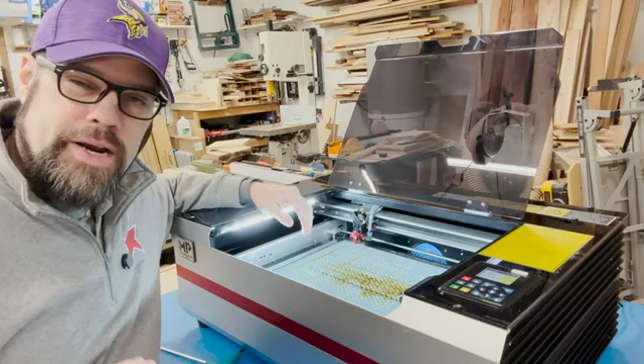All right, so I've brought you in a bit closer to take a look at it. We've powered up the machine. And so this is what I'm talking about. This honeycomb just kind of sets in here and it can slide around.

Now, if I want to have a repeatable cut, I need something that's fixed, that's going to hold its position relative to the machine's home point that I can then repeat. I can drop the material in and know that it's going to be going to the same position every time. So as we move this around, the working area of the laser is about the honeycomb actual area.

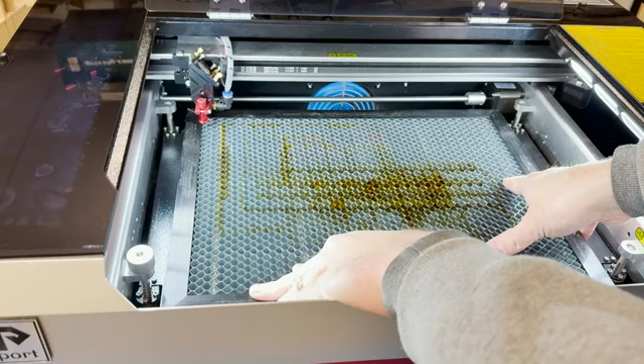There's maybe about a 1/4 inch extra in both directions, so not a lot of extra area to work with. So what I'm going to do is kind of take a look at where this needs to sit and see what our options are. So if we move this up into the corner, and I'm just kind of basing it off the red dot light in the corner of the honeycomb there, we bring this down, we got it a little bit crooked.

We've got a little wiggle room. We could slide this back just a touch maybe. And I think to get this really dialed in, I'm going to want to get maybe get some white paper on here so we can really see that red dot. But we're going to kind of make sure that it's going to be within the bounds. And that's pretty close. Now let's take a closer look at the sides.

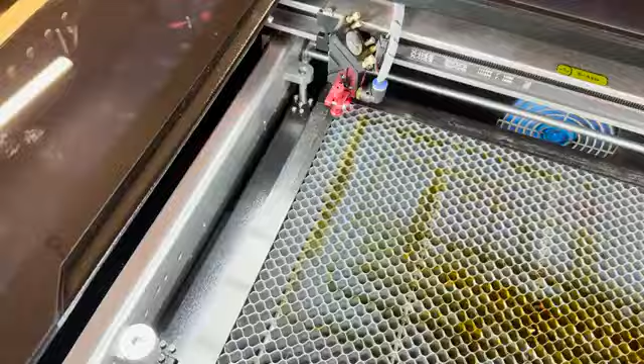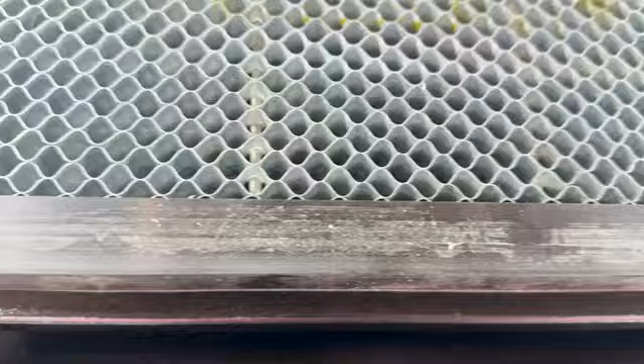So my thought process here is we have kind of this section, this side rail here, where we could put kind of a bracket. Same thing over here. Now up front, it's a little bit closer to that, but we could make a little bit of a corner bracket here that would maybe wrap around. It would catch the front and it would catch the side, kind of locking that in place.

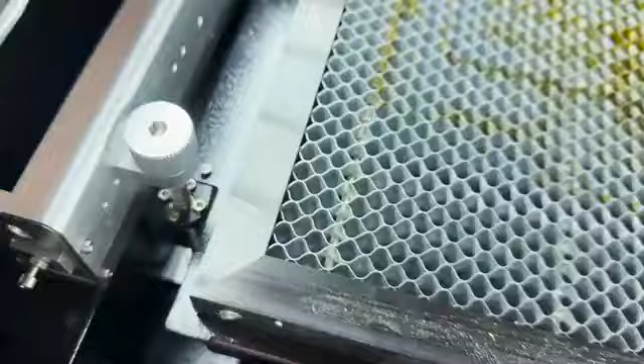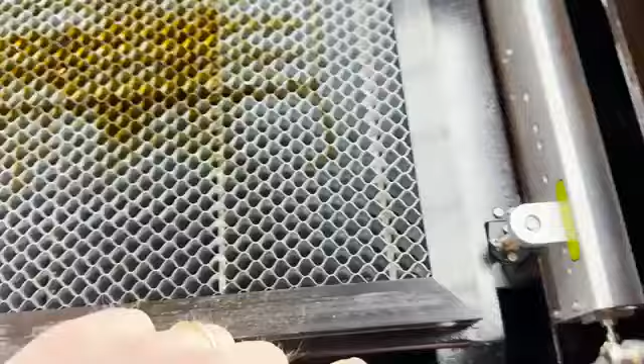Unfortunately, it actually at this point is overhanging the back, and so it's going to be hard to get anything on this side holding in. So I'm going to be mostly relying on maybe some side points and then this corner point, and then we just need to make sure it's slid all the way back this way.

So let's jump into the computer, see what we can design and 3D print out, and then we'll come back out here when we got the parts.

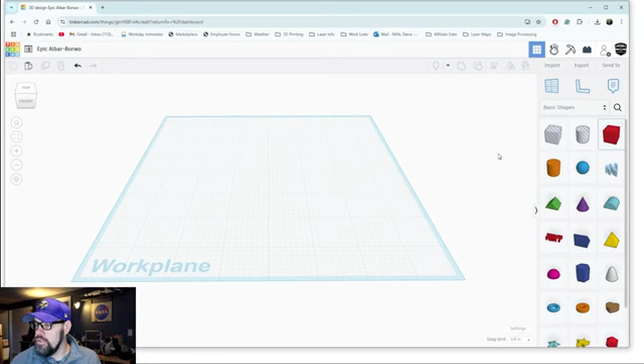All right, we're loading up Tinkercad here, and so this should be fairly simple to make. We're going to be mostly just using some blocks here. So I'm just going to drop in a block and I'm going to create the base first. So we really just need this to be about an 1/8 inch thick, and we probably don't need it to be quite this wide. We're going to go 5/8.

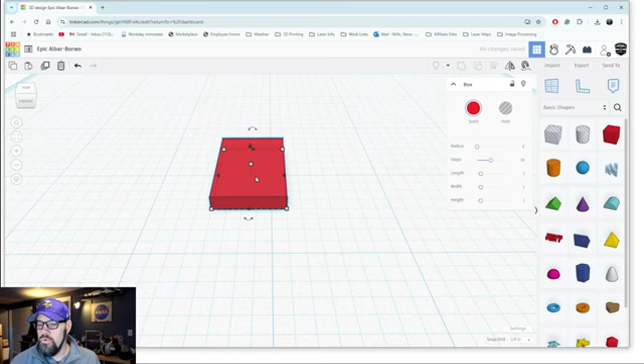And what was the other dimension? The other dimension was an inch. Yeah, an inch long should be good. So I'm going to go ahead and Control C and V. We're going to copy that.

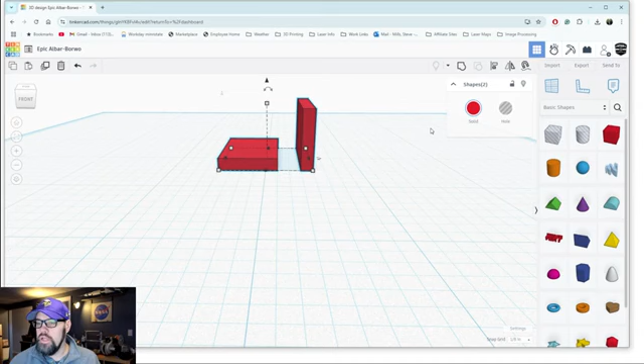And then I'm going to take this one. I'm going to rotate it up on end. There we go. And we can bring that up to the surface. And now I'm going to just simply align these two. We're going to come over to our alignment tab, and we want to go here.

And that looks good. So that'd be a decent bracket, although 5/8. Yeah, let's bring this one down to 1/2 inch.

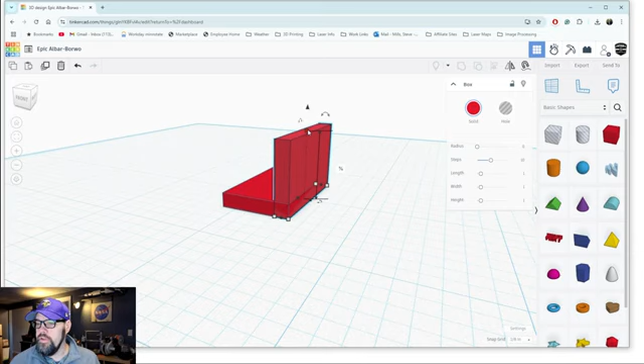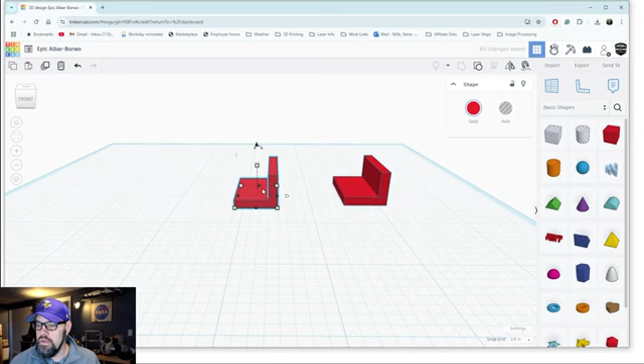There we go, I don't want it sticking above the honeycomb. So that should be great for the side rails where we don't need any capture point. I'm going to go ahead and copy that, bring this one over, but then we're going to turn this one into a solid and move that to the side for now.

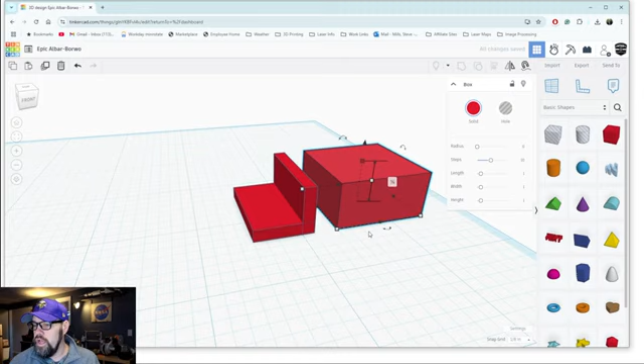For this one, we want to add - we're going to be capturing on the side, so we need something to stick out this way as well. So we're just going to drop in another box, and this one we can bring down at 1/2 inch. And we definitely don't need this as thick as that, we're going to go 1/8 inch.

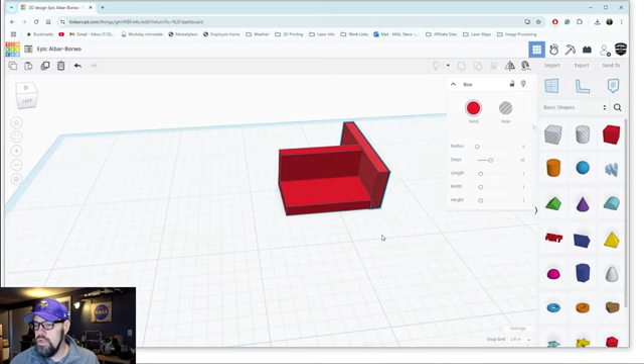And we actually want it - I think we're going to anchor it over this way, give it this nice little T shape off the side. And yeah, actually, I think that will probably work out okay. So I'm going to go ahead and combine all of these three.

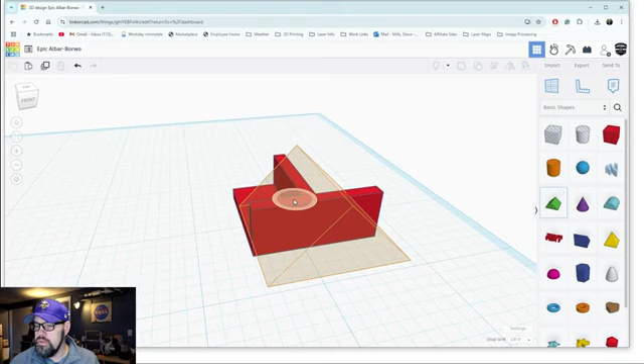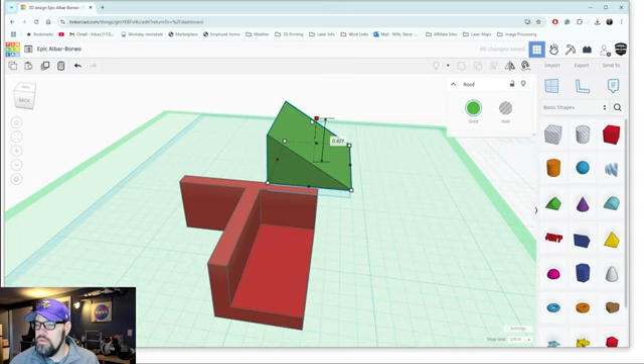About the only other thing we can maybe do is take this triangle piece and I'm going to rotate this that way. And I can bring this down, this in.

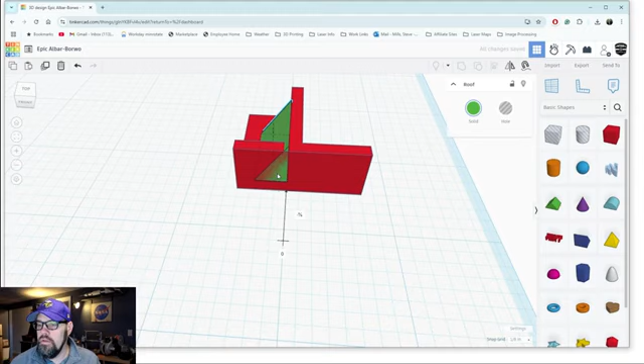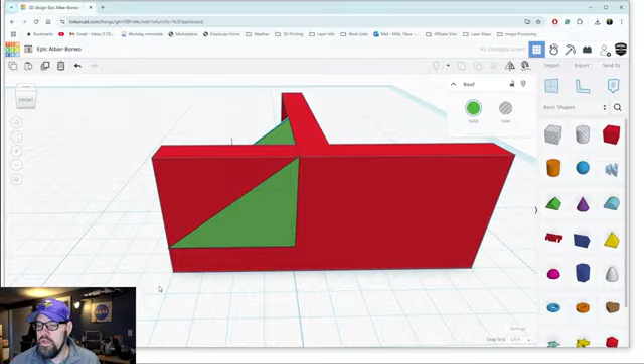Where are we at here? All right, that's in alignment. Now I just need to bring this down to there, and I need to bring this out to there. Then we're going to bring this to there. All right, that should be good.

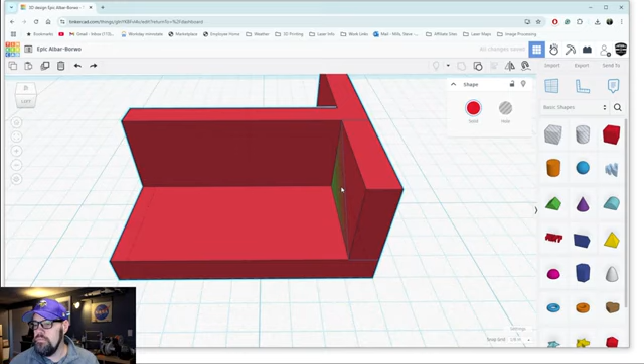Now I want to do - oops, undo that. I want to grab that and I'm going to rotate it 180 degrees. Negative 180. I'm going to turn it into a hole.

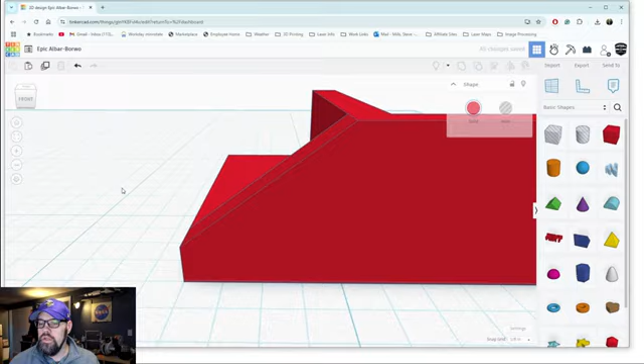And then we're going to take these and combine them. There, it just gives it a little less of a sharp edge that's going to be hanging out there. Also a little less filament for us to use. Makes it a little more interesting anyway.

So the idea is this is going to be sitting on the rail. This will capture - the honeycomb is going to sit inside of this corner. And we'll actually need to make a mirror copy of this.

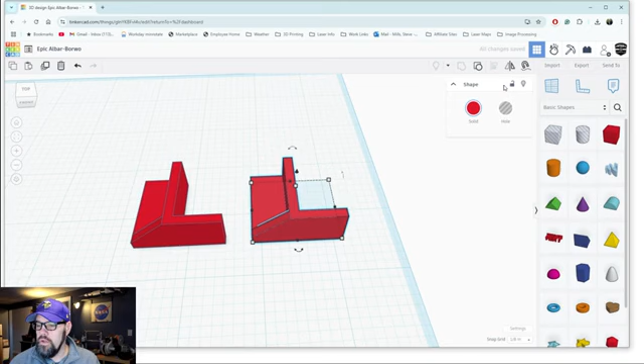First we're going to copy it. Now we will take a mirror copy this way. And now we have those two parts. I'll print out a bundle of these so we can have them to play with as well.

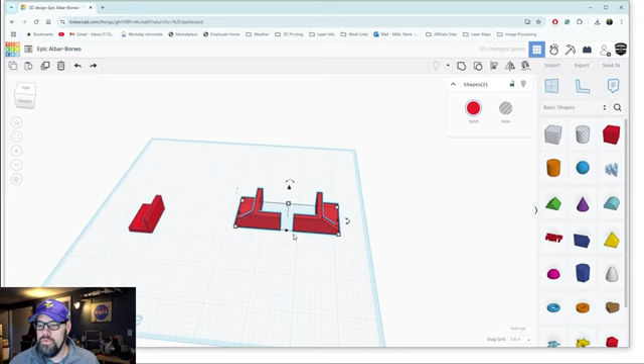And I'm going to send this off to the slicer, so I need to export this. Oop, it's meaning to slide this over here. All right, I'm going to go ahead and export this as - well first off, I'm going to change the name. So we're going to go Reno Honeycomb blocks. Now we'll export it.

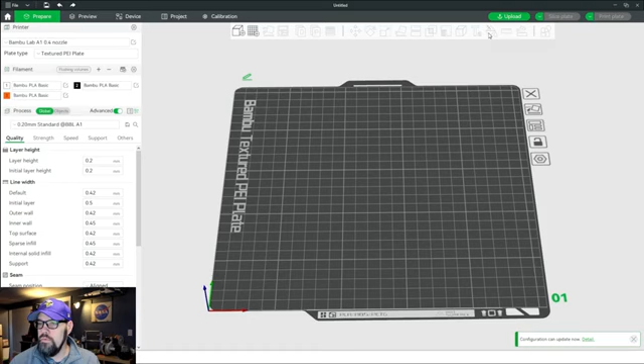STL, go to my downloads folder, we'll open up Bambu Slicer, and we're going to go ahead and import. So I got to drag that file over to my downloads folder. There we go. We are going to change filament to the orange that we've got loaded into the AMS. We're going to clone that. Now we probably will need 4 total.

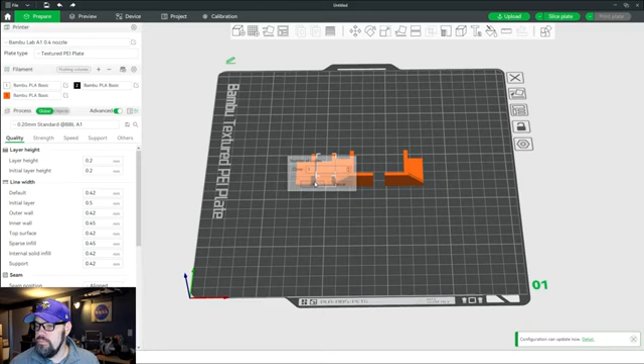Just that, let's just bring this one down over here. All right, we're going to slice this. Looks like it's going to take about half an hour to get those done. So I'll send those off to the Bambu, we'll get them printed out, and then we'll head back out to the shop.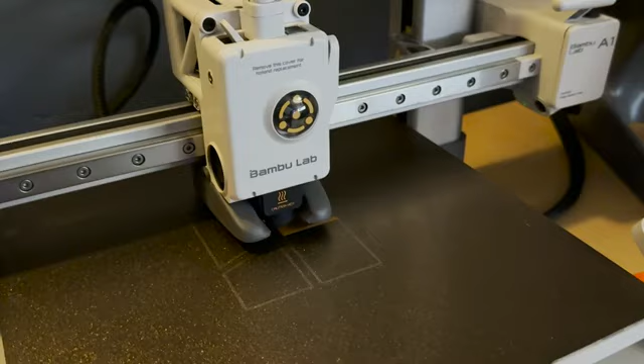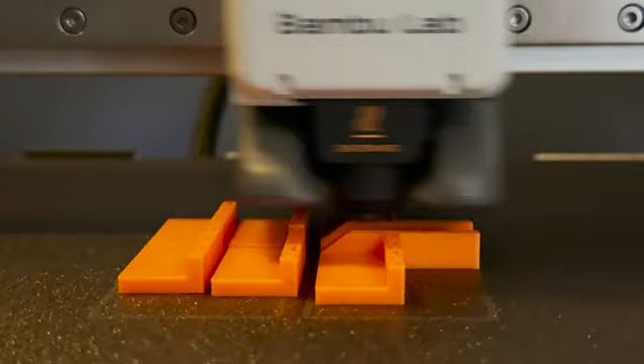Now, I've had a lot of people comment on, are 3D printers really worth it in a shop? It seems like you just print out silly things you could buy at Walmart or other stores. And this is a kind of classic example of where it is really handy to have the 3D printer. I identified something I wanted to improve in my shop, was able to design the parts, and we'll be able to drop them into the laser and make this work. So hopefully you can see this as an opportunity of why one might be useful.

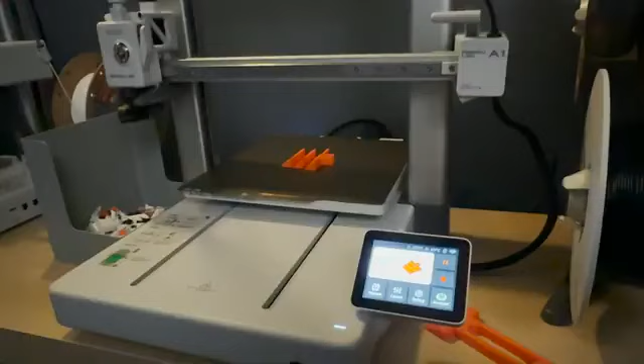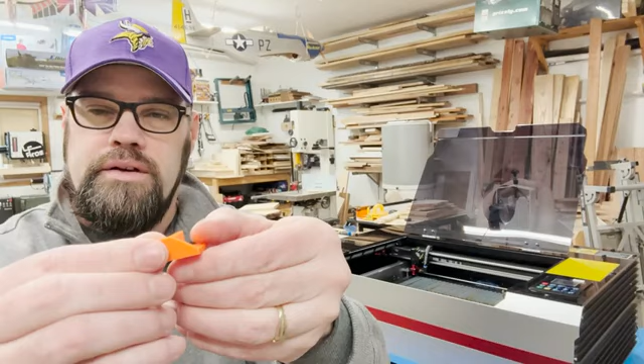All right, so got these printed out. We have the side pieces here that are just the L shape, and then the kind of corner one that we're going to put up front. 1/8 inch material, it seems pretty strong at this point. This is just PLA, just doing it as a test, and I think it should be fine as long as you're not really pressing it hard.

You just want it snug, you know, it doesn't need to be like holding it tight. So let's zoom in on here, let's see if we can get this aligned. And I think what I'm going to use to put these down is just some double-sided tape. It should hold fairly well, but if I need to pop them off, they will be.

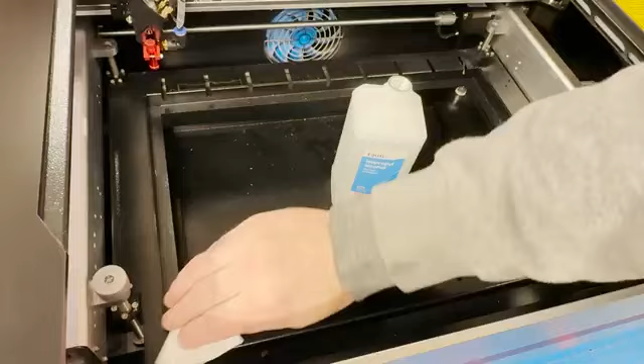So I'll probably clean the frame first with a little bit of alcohol, make sure there's no dust on there. And then we'll get this positioned to start putting them in place. So I start by just wiping down with some alcohol. We want to make sure that these are clean, otherwise that double-sided tape might not stick.

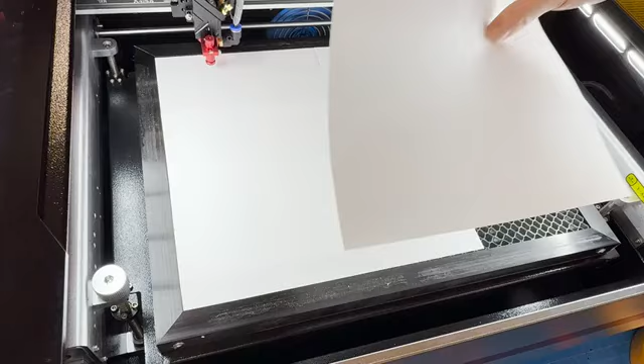So I'm going to place the honeycomb back in, and then I'm going to drop some white paper on here. It's just going to help me make sure that the red dot is showing up in the corners. I want to get this as centered as I can because this laser does use almost the entire honeycomb bed area. So a little bit of adjustment to make sure it's in place, and then we can start placing our blocks.

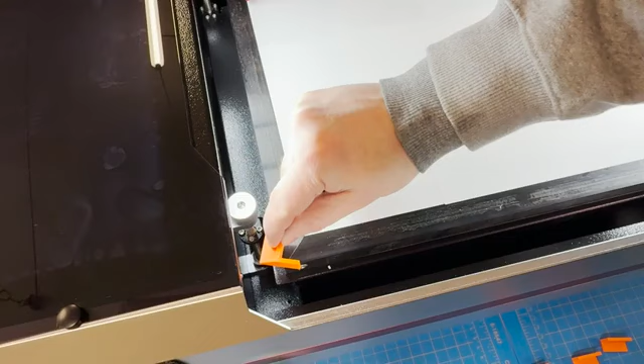Okay, so what I'm finding here is these little rivets on both sides are actually keeping this from grabbing the corner. So I think I may take some measurements here. I'm going to redesign it. It's also hanging over further than it needs to be, so I can probably shrink it up just a little bit. So iterations are part of this process.

I'm going to go ahead and redesign those, and then we'll print them out and check it again. All right, we're back at the computer, and I think it's a fairly easy fix.

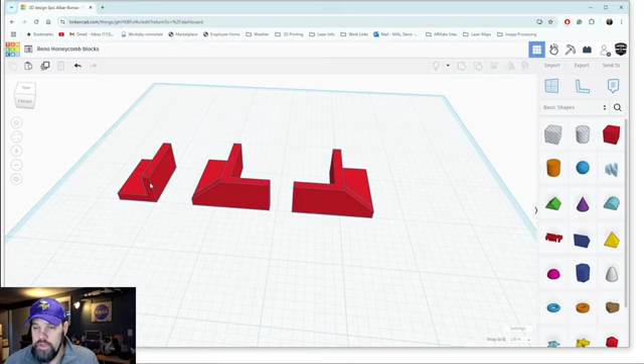I'm going to really just squish this down. This doesn't need to be any higher than 1/4 inch, and then it'll capture that. And that should still grab the honeycomb, and then we can bring this side in. So hopefully here, if we just bring this down to 1/4 inch like that, we're going to need to chop off 1/4 inch off this one.

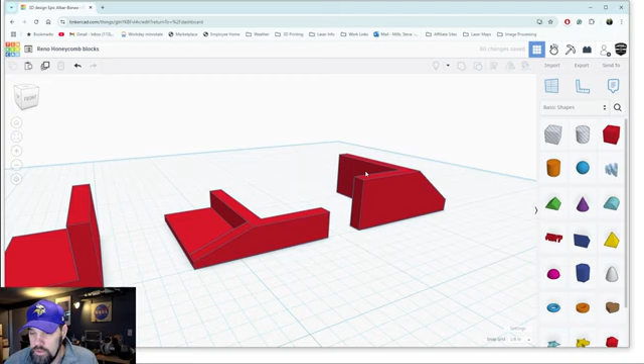So an easy way to do that is just grab our little block. We are going to make this—doesn't matter really how tall that is. You just need this to be 1/4 inch. And now we can move this to there.

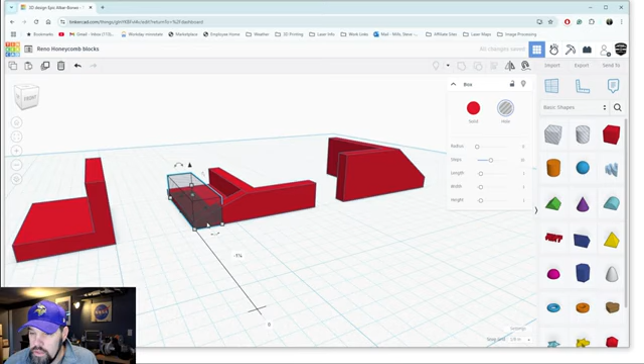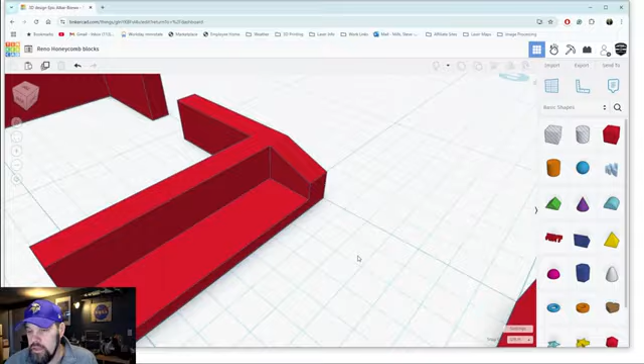Bring that out there. And yeah, we can just combine those. That will trim it off. That'll still give us some meat on that side. Place to stick that down. Those should be underneath the rivets on both sides.

So I'm going to get rid of that one. We are going to go ahead and copy. I'm going to mirror this that way. And then we'll go ahead and export this again.

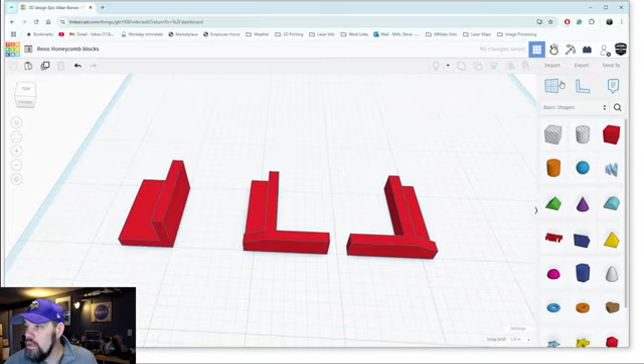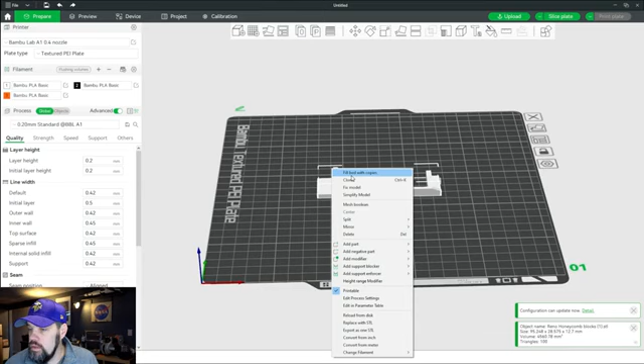Bring it back into our slicer. So we're going to come back here. Don't need—oops, hold down shift. Don't need these, we're going to re-import that. And then we will... I don't need that one, but I'm going to save those others just in case.

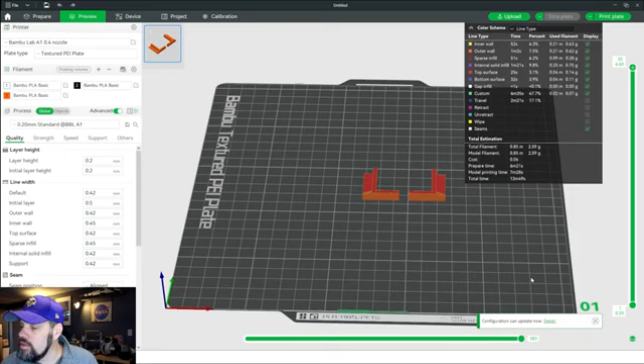So this is all we need to print at this point. I do want to—oops, let's select both of them, and we're going to change that to the orange. Go ahead and slice this. Slice looks good. It's going to take just as long to prepare as print, but in 13 minutes we'll have the new parts, and we'll see if those fit.

All right, so I did shrink down these corner pieces. They aren't very tall, but they should still work. We're primarily concerned about capturing that corner. Things aren't supposed to be moving around, so this will hopefully work.

So I'm going to get everything lined back up in here. We'll square it up, and then what I'm going to use is some of this X-Fasten double-sided tape. I'll stick it down to these sides, trim it out, and then as we get them placed, that should hold them in pretty well. There may be just a millimeter of variance possible, depending on how well I get these in, but I think that'll hold it close enough for being able to use some jigs and fixtures. So let's zoom back in, we'll see how this gets installed.

Okay, so I have it kind of squared to where the red dot, where the laser is supposed to be hitting, is within the white area, which is within the honeycomb. So what I need to do now is start getting these put down along the sides. So again, I'm going to put double-sided tape on there and probably just slide those down in there, maybe a couple on each side. And then we have our corner pieces.

And so here again, I need to, on this little piece, be able to get that on and into that corner as tight as possible. Again, we're going to use some double-sided tape, get that in there. Same thing over on this side. We'll drop these down in there, hopefully get them as tight into the corners, and then that should keep it in line—these are more to keep it from sliding this way.

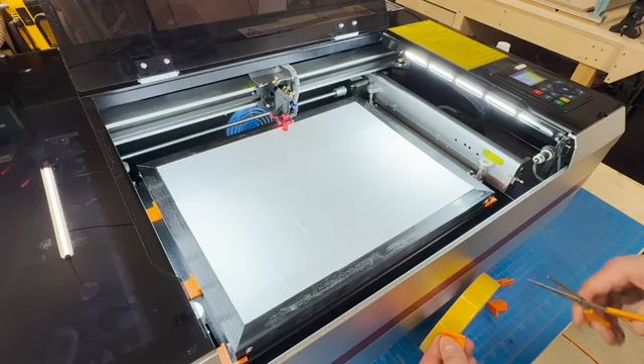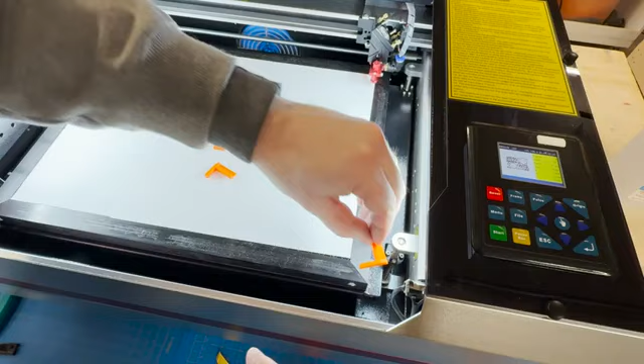Again, we won't have anything on the back side, but let's get the tape on, get these stuck down, see how it fits. This is some 1-inch tape, which works out well because I printed those out as 1 inch long. So the square ones are easy, you just place it on and trim off the excess. On the corner ones, I had to do a little bit of extra trimming just to make sure it didn't stick over—I didn't want the honeycomb sticking to this. So, taking some time, clean that out, and then we can start placing them. Pulling off the backing and then holding it in place, we want to make sure that honeycomb stays centered.

With the corner one in place, we can go ahead and drop the other ones in on the right side, getting both front and back in place. Then we slide over to the left side, get that corner one in place, making sure we're not moving the honeycomb. Once we have all six in place, it should be good and secure.

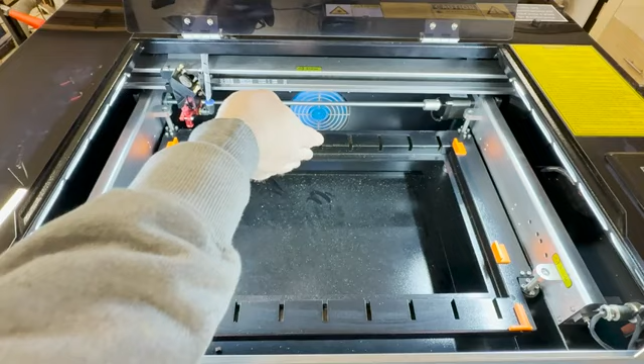Now with all those in place, this isn't going to move, but I can still pull this out. Those should be out of the way of all the slats. Also, most of the pass-through, these little corners may, if I had something very wide, could possibly get in the way.

But generally the bed's going to be lower when using that pass-through. So all I've got to do is slide this down in there, notch it into the corners, and now it's not moving. Simple solution: 3D printer, a few little corners, and it can slide that way, but as long as I push this back, there's nothing that should move it around.

It's going to be all locked in place. So now I can use the honeycomb weave itself to set up some jigs and alignment things. I'm happy with how that fits. That's going to keep the honeycomb from moving around. It can slide forward, but as long as I'm aware of that and make sure it's butted up against those front stops, this should work out great.

Like I said, maybe the only thing is if I use this pass-through slot, this little red bar actually slides out of the way. It might get in the way, but I still think the bed's going to lower down enough that those aren't going to be an issue. We'll just have to see in the future.

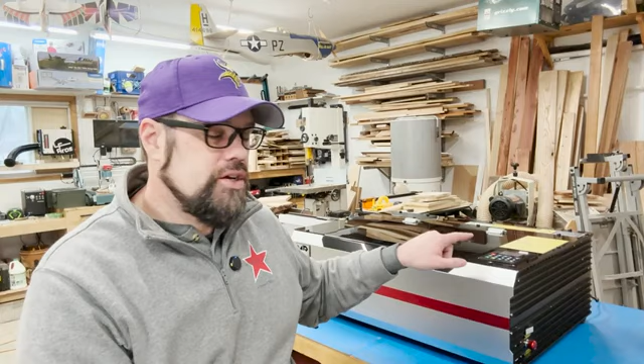One of the nice things about doing this is this controller allows you to save jobs or load jobs directly to it from USB. As long as I do that with a known origin, I can create a fixture or jig, put it in here to hold material in the right spot. I can load up the job, do a quick focus, and I don't even have to worry about framing in Lightburn and such. After I set it up once, I'm good to go.

Same thing with running a job through Lightburn. As long as I'm using absolute coordinates, set up the fixture or jig in there, know that it's locked into the same origin relative to the homing point, it makes it so much easier and faster to do repeatable jobs.

So we'll probably take a look at that later. I wanted to just drop this video out there as I'm playing more with this laser. It is a very nice economical CO2 laser, a nice benchtop style. If you don't have a lot of space and you don't want to spend a whole lot of money, this is a nice way to get into it. But there are a few tweaks that I'm finding I want to do to make it work even better for me, so I thought I would share this with you.